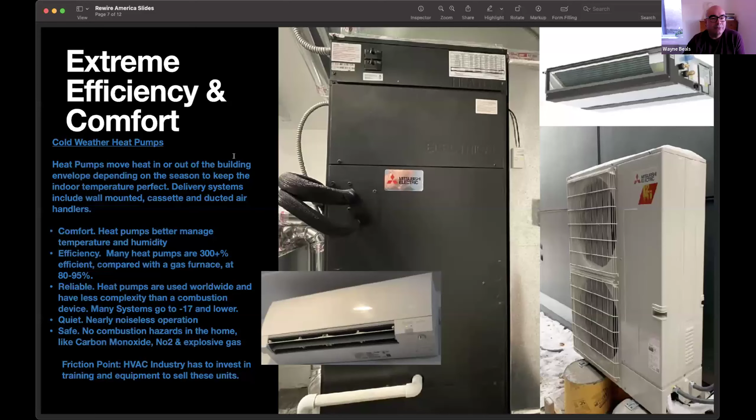Valaria, thank you very much for putting this together, it is really great to present to everybody today. I want to share with you guys a little bit about what we're doing here in the Chicago market. So I'm going to share my screen here, make sure that you guys can see what we're doing.

Sorry, moving ahead a little too far. So my name is Wayne Beals. I'm a real estate broker at Exit Strategy Realty, and I've been in this market about 20 years. Like most real estate brokers, I started off selling every house that I can sell. I met Benjamin, who's one of our speakers today, a long time ago when he was still building gas-powered homes. I've been on this journey with him in building all-electric homes. I also live in an all-electric home myself.

So around November of 2020, my family and I decided it was time to move and purchase a new house. We couldn't find an all-electric home in the market to buy. I had been selling them with Benjamin for years at this point, so I knew that's what I wanted. I understood the benefits of it myself as a consumer.

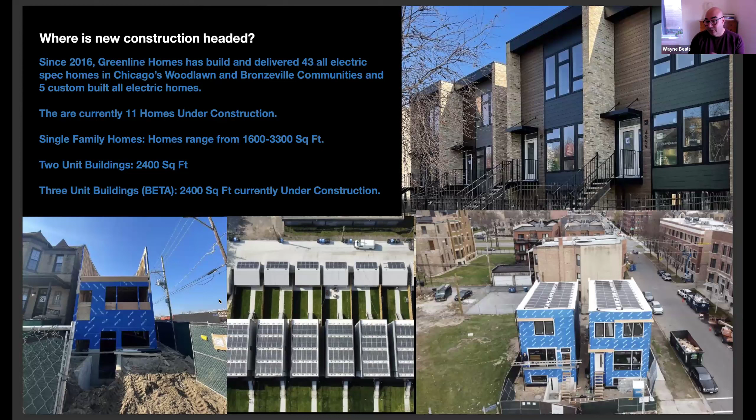The big thing you have to understand when consumers are buying a home is they don't want to sacrifice anything for sustainability. I think it's a sad thing to say, but consumers really want to not have to give something up to have a more efficient home. So when we are selling and marketing green homes, to be successful at it, you really have to deliver a home that is superior. Now, how do we do that?

Well, we start off with building a home that is better insulated, that is air sealed, it has all those conservation features. So you get a quieter interior, you get less maintenance. The home is more comfortable because it's better insulated and doesn't have air leaks, doesn't have drafts. It's more affordable to fuel and it's more affordable to heat and cool.

The building is safer. It doesn't have gas in it, so there's no explosive gas, there's no carbon monoxide hazards. There's obviously better indoor air quality. The home is built to a higher standard. They're not subject to utility cost increases like a gas-powered house is. Our base gas delivery charge here in the Chicago market is over $30 with 0 therms used. So gas can be a very expensive thing for consumers to have.

The ability to offset your electricity using solar is also another big benefit of going all electric. You can basically own your own power.

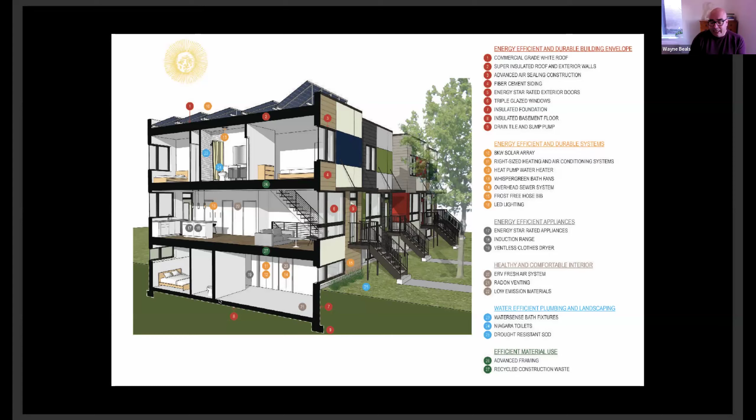Induction cooking is an upgrade from gas cooking. You get more control. The cooking process is safer because there's no open flame, no explosive gas, no fumes coming from the cooking. It's certainly more efficient. With induction cooking, about 90 to 95% of the energy you're using is actually being used to cook, as opposed to a gas cooktop where a significant portion, over 50%, is actually heating up the room or going up the hood.

It's certainly easier to clean. You don't have any heavy grates in the way. Because the cooktop stays cold and uses magnetic waves to only heat up your cookware, there's no charring on the cooktop, so it's much easier to keep a neat and clean appearance. With so many open concept kitchens out there, it's nice to have a range that's easy to keep clean and looking good. These are things you really have to talk to the consumer about, just to build up their excitement about transitioning to a cooktop like this, because most consumers have not used an induction cooktop before.

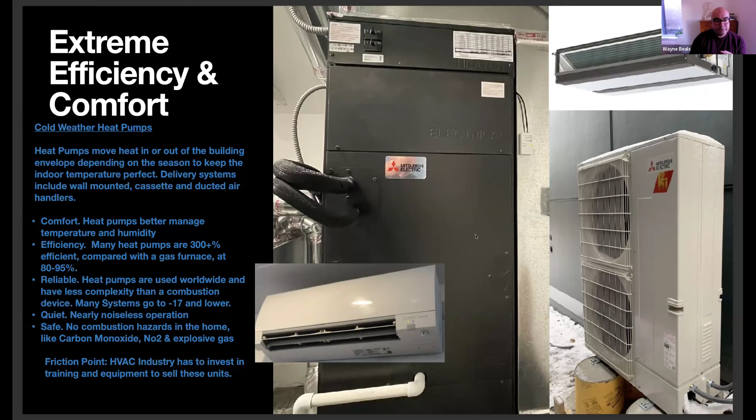What we're doing here is taking ambient heat from the room, and it comes into the unit. That heat is then transferred using refrigeration into the water tank itself. By doing that, there's a very high level of efficiency—over 300% in the energy we're using.

These systems also have really high demand recovery settings. So if you have an occasional situation, like everybody getting ready for a wedding and taking showers one after another, this has resistors in it, like a typical hot water heater. It can heat the water not only with the heat pump, but can also fire the resistors to keep up with a high level of load.

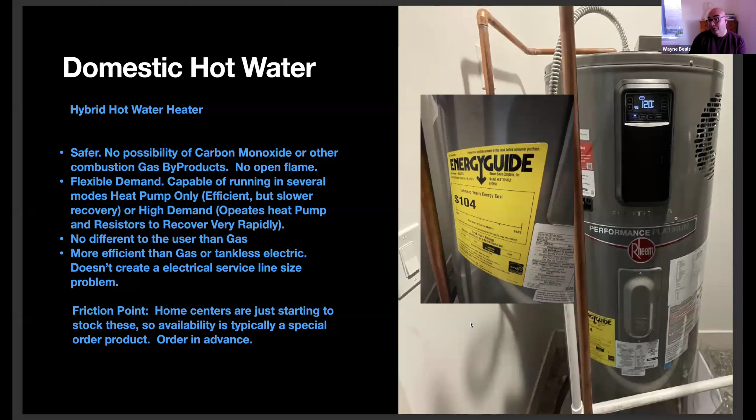Big friction point here: if you're thinking about switching out your water heater at home, you really should consider that home centers don't currently stock these in great numbers. Most people wait for their water heater to start leaking or fail before they replace it. If you're planning on switching to a hybrid heat pump hot water heater, which is a no-brainer if you have a gas water heater because it's safer and better, you should do it before your unit fails, because it may take some time for the home center to get it in stock.

What's great about heat pump dryers is they simply take ambient heat from inside the room, condense it into the drum, and cycle that heat through the drum, so they don't exhaust to the outside at all. A lot of you are probably familiar with seeing a plume of steam outside the building in the wintertime when a dryer is running. That's heat being ejected out of the building along with the moisture from your clothes. I call that throwing the baby out with the bath water.

In the wintertime, you want to keep that heat inside the building. What these units do is take ambient heat and move it into the drum, where it stays. There's a cold coil in part of this system, and it runs that warm air, which picks up humidity out of your clothes while drying them, over an ice cold coil. This condenses the water in that air and pumps it into the plumbing system. So there's no need to vent to the outside, and no need to exhaust all that expensive energy you're spending to dry your clothes.

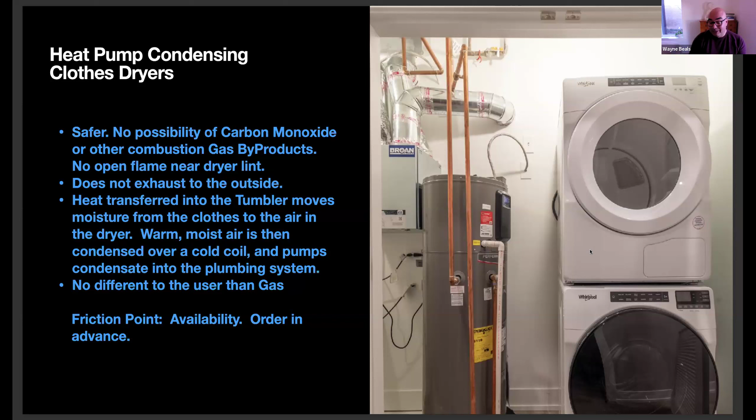To the user, there's really no difference between a gas dryer and a heat pump clothes dryer, so it's a very low friction thing to switch to. The biggest thing I tell people is that you just have to order these things in advance. We're starting to see, at least in our market area, hybrid heat pump dryers being stocked, but until recently that wasn't the case and you had to order them special. So if your dryer fails and you need one right away, it's actually really hard to get one unless you have one on order.

We talked a little bit about our HVAC systems. I want to circle back to indoor air quality, because we've mentioned that a couple times with removing combustion from our building. Once you build a building more airtight and better insulated, you really want to pay attention to your indoor air pollution sources.

So we use an energy recovery ventilator. How this simply works: we take air from the outside, bring it in, pass it over a heat exchanger, and then into the HVAC system. We take the same amount of air out of the return side of the HVAC system, run it through a heat exchanger, take that heat, move it to the incoming air, and exhaust the stale air outside. This is basically the equivalent of an open window 24/7, 365 days a year, without the energy penalty of an open window, and without the allergy or outdoor air pollution penalty.

This past summer in Chicago, we had some pretty bad air quality days with wildfire smoke from Canada that rolled in. When you build an airtight building and have one of these units, you can actually keep your indoor air very clean, which is healthier for you and your family. I personally believe that a sense of security and safety is one of the primary functions of a home, just being sheltered from those environmental pollutants.

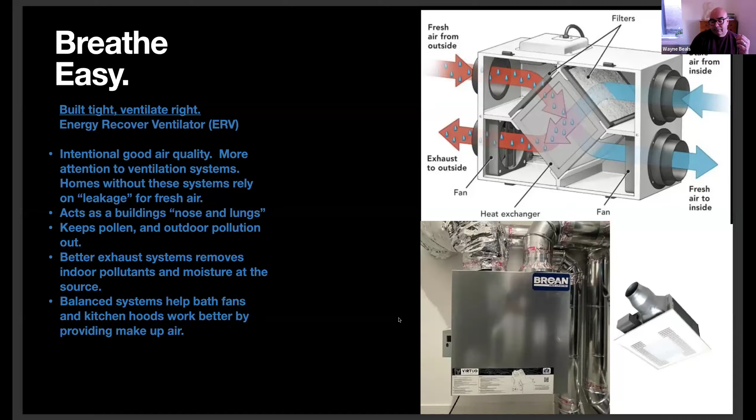So once you've made this migration, you've got a heat pump clothes dryer, a heat pump water heater, an induction range, and a cold climate heat pump heating and cooling your building. You don't need gas anymore. And what's really wonderful about that is you can switch to solar PV.

The way we've designed our setup, we overproduce power from March through October, and we net meter. So effectively our meter is spinning backwards during those months, and we're banking that extra power with our utility, ComEd. Then ComEd gives us that power back during the winter months when the days are shorter, the skies are more overcast, and the sun's lower in the sky.

So we are grid tied. To reinforce that, we're not off the grid, but grid tied solar can be really beneficial by offsetting your energy cost and really allowing you to own your power.

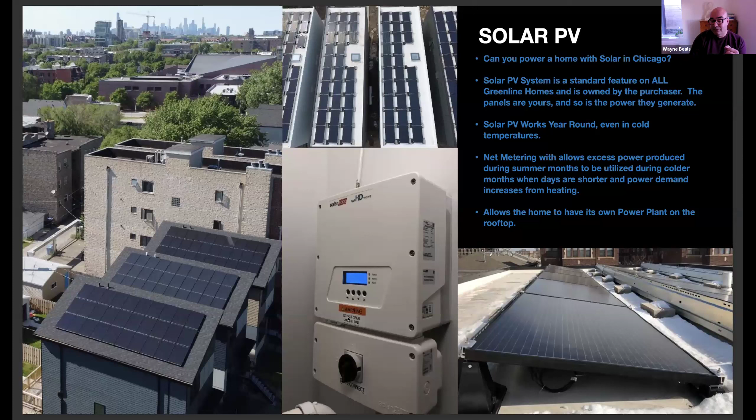So in summary, it's a win, right? It's a win for the consumer, it's a win for the home builder, it's a win for the community. I encourage all the builders out there who are considering moving towards an all-electric footprint — this is something you really want to get ahead of. This is where a lot of the most successful and best builders are going, and your competition will get a leg up on you.

We have discussions all the time about our effect on our market area. The reality is, when Greenline builds a home in a market and somebody builds a home right next to them that's not all electric and not sustainable, that home is not going to sell until ours does. So we are a real disruptive force. As more and more builders start building these houses, they're going to be more and more competitive, and you don't want to be the last home builder to the party.

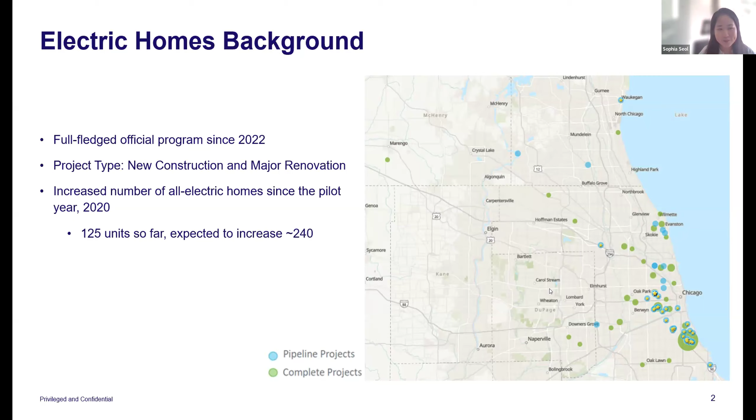These maps clearly show how the number and location of electric homes expanded geographically, not just in the Chicago area but into the suburbs as well. We have a lot of homes in Marengo, Evanston, the very north and southwest sides of Northern Illinois — growing from 11 homes in 2020 to 68 units in 2023.

I know a lot of people might be curious, like, why build all electric? Why are electric homes so fascinating? I know Wayne just went over very well with all the electric homes benefits, but I want to show and share a few more successful stories that builders and homeowners shared with me on their homes and projects.

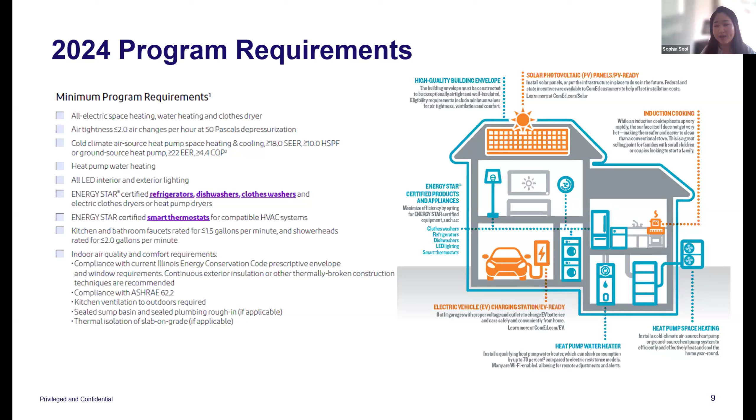That starts with a high quality building envelope, well insulated, with a heat pump space heating system on the bottom right. There's a heat pump water heater next. Also for appliances, think about Energy Star certified refrigerator, dishwasher, clothes washer and dryer, LED light bulbs, low flow faucets, and smart thermostats if compatible with the HVAC system you chose. Also ensure indoor air quality and comfort requirements. The orange colored ones are not part of the requirements, but we highly, highly recommend those: solar, EV charger, and induction cooktop. Wayne just went over all the benefits of the induction cooktop, so we definitely recommend having one for healthier indoor air quality.

We started to see more small multifamily projects. The requirements are still the same, but there are just a few additional requirements around common area lighting power, and parking garage interior and exterior lighting power as well.

Incentives are very straightforward. For those who achieve the requirements we just went over, we provide a financial incentive per unit, depending on the square footage. We have a 3-tier system where, depending on the square feet of the unit, you will be able to get $3,000 up to $5,000 per unit. So let's say you have a 2-flat project that's 1,000 square footage each unit. That means $4,000 per unit, totaling $8,000 for the project.

The Home Energy Rater will also receive a $200 per unit incentive, as they will help us fill out the rater workbook when the project is completed.

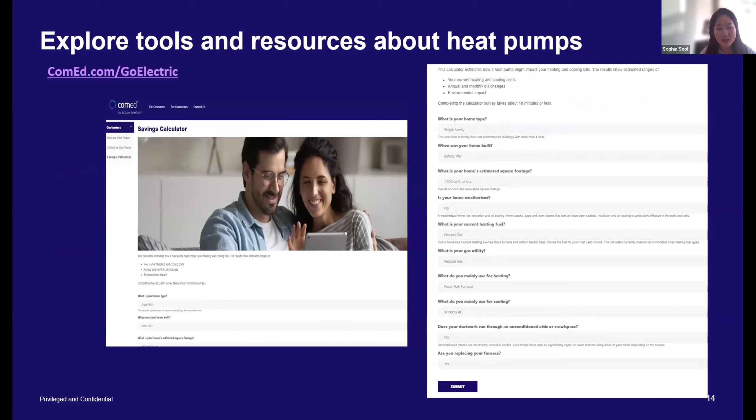I want to share these resources. There are a lot of tools and resources you can look into to learn more about heat pumps. We actually have a savings calculator available for you guys to use. If you enter home type, the year the home was built, the square footage, things like that, it gives you an idea of how much your electric bill will change, whether it will decrease or increase. I think it's a really useful tool to take a look into.

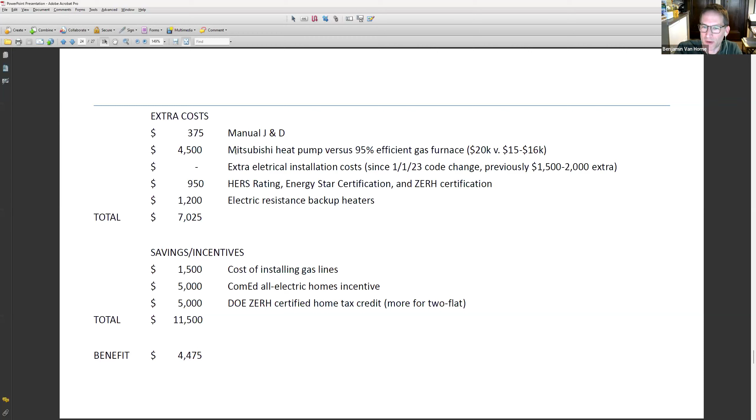The cost of the heat pump water heater and your heat pump dryer—these are those costs. So you can take those and compare them to whatever you're installing. They're not wildly expensive compared to a high quality alternative version of those.

Well, this is so great. Thank you so much. I think going through the math really helps folks visualize how this can really pencil out as a project. I really appreciate you sharing this slide.

And aside from the cost of an all-electric home, how difficult has it been to convince your subcontractors—your HVAC guys, your electricians, et cetera—to make this transition with you?

Electricians, no problem. Just tell them what the equipment is, they'll look it up and provide the needed power for it. They're happy—I mean, it's more work for them.

The plumbers kind of have a trade-off. They're not installing gas lines anymore, but they do have to install drains for your heat pumps, which all produce condensate. The water heater produces condensate too, so that's drain work they have to do.

Your HVAC contractor, I'd say, is your trickiest one. I believe there were more heat pumps sold in America last year than traditional gas furnaces.